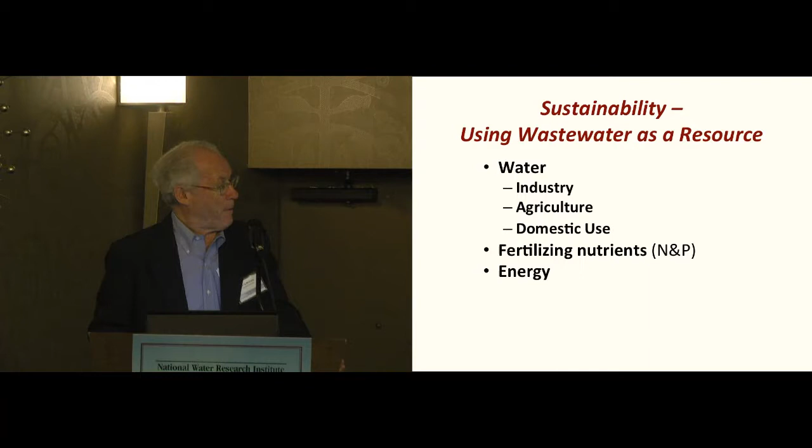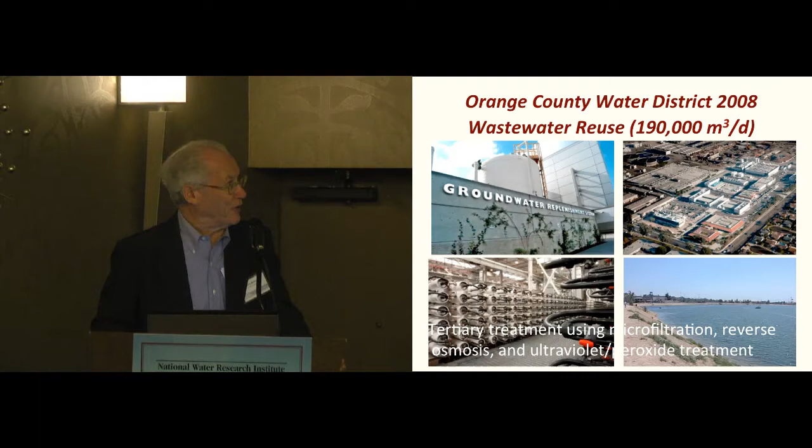Here, Orange County, of course, has pioneered reverse osmosis for reclaiming water. That was the major effort there, and it's certainly spread all over the world. Singapore has at least 5 treatment plants and is building more, using this in water-short areas. That's a very important process that has allowed us to expand our water resources.

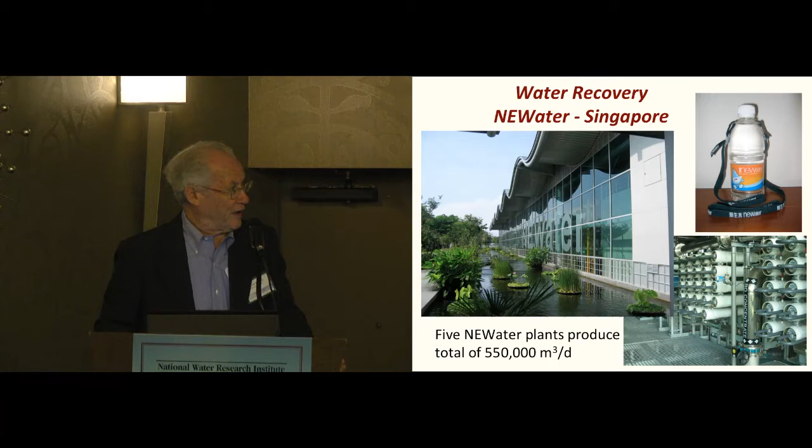However, if we look at the energy requirements in doing this and compare it with conventional aerobic activated sludge treatment, about 0.6 of a kilowatt hour per cubic meter is what the energy costs for doing that. If we add nitrification, we've got to add a couple tenths more onto that. There's a lot of emphasis today on aerobic membrane bioreactors. Going through the membrane takes a bit more energy, increasing it a couple tenths more, up to about 1 kilowatt hour per cubic meter.

Now, if we then go to reverse osmosis, as we're doing here in Orange County, the energy jumps up very high to 2.5. So while we're recovering water and going through more and more advanced treatment, we're putting in more and more energy. What I wanted to say is, can we achieve some of this without that? The process I'd like to compare is with the aerobic membrane bioreactor at 1, going that far, and see if we can do better than 1 using an anaerobic system.

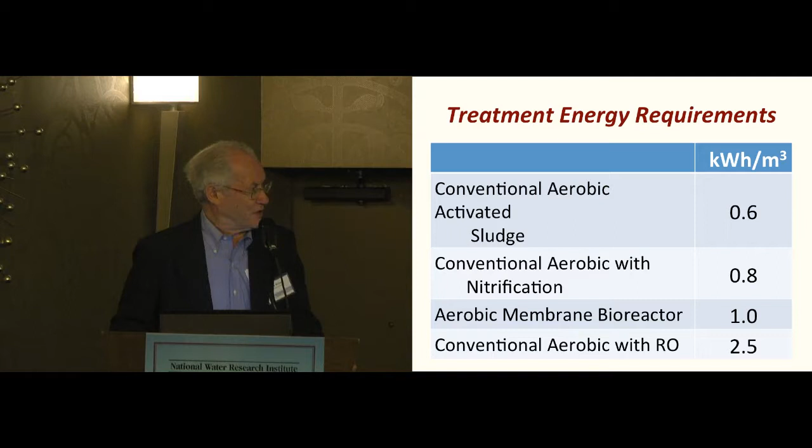So let's first look in general at what is the best option if we want to recover not only the water but also energy and nutrients. One good example I like to show is Monterey Bay, where, like here in Southern California, we're using groundwater, extracting groundwater, causing seawater intrusion. That's what happened here. This is a major agricultural area, not only for the state, but for the country.

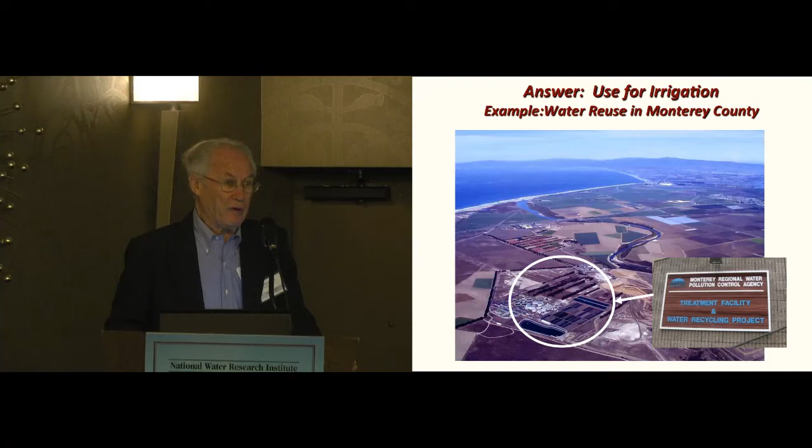By extracting groundwater, seawater intrusion destroyed that water supply, so they needed an alternative. They didn't have any other option except the treatment plant. The interesting thing here is that it's just conventional activated sludge with filtration—no nitrification, no need to remove nitrogen, because the nitrogen acts as fertilizer. So they go through the normal 0.6 kilowatt-hours per cubic meter treatment, sand filtration, multimedia filtration, and then put it onto the crops.

This is a major crop producing area. Something like 60% of the artichokes in the country come from this area, sprayed with this. A couple percent of the lettuce, strawberries, broccoli, and so forth that you're eating come from this area, grown with reclaimed sewage.

They do not have to remove the fertilizers—the fertilizers are used here. They grow crops 12 months out of the year, and they also have cogeneration with digestion, which produces 50% of the energy. So here they have a situation where they're recovering the water, recovering the nutrients, and recovering the energy, and I think that is the way to go.

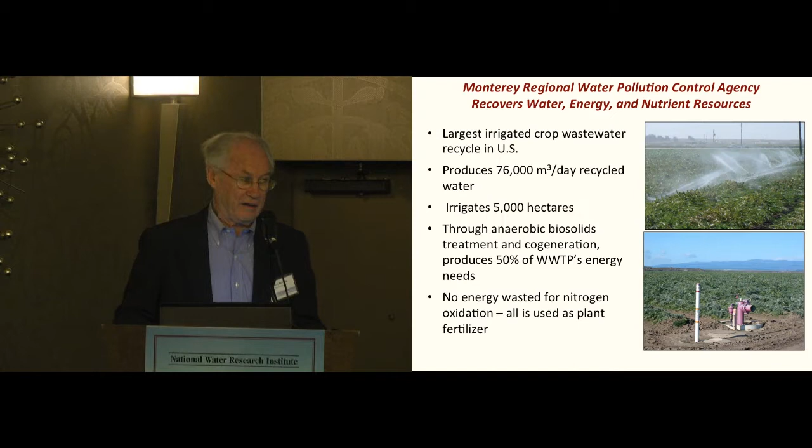Now, using it for agriculture this way—remember, in California we use something like 80% of our water for agriculture. Agriculture is consumptive use; you can only use it once. So if we use it first for human use in the cities, and then use that water for agriculture, we get two shots at using the water. If we use it on agriculture first, it's only one. So I think doing it this way makes a lot of sense where we can. I know we can't do it everywhere, but I think this would be our first option, and then we look at others depending on where we are.

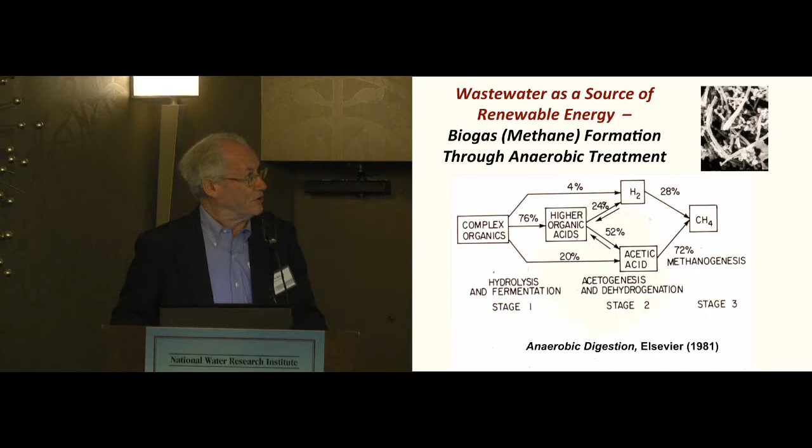Many years ago, over 50 years ago, my doctoral work was on anaerobic treatment, because I thought it was such a wonderful process for resource recovery. Even back then it showed a high degree of waste stabilization—converting waste into useful end products—low production of waste biological solids, which I want to emphasize very strongly, low nutrient requirements for industrial waste, no oxygen requirements, and of course producing methane, a useful, renewable fuel.

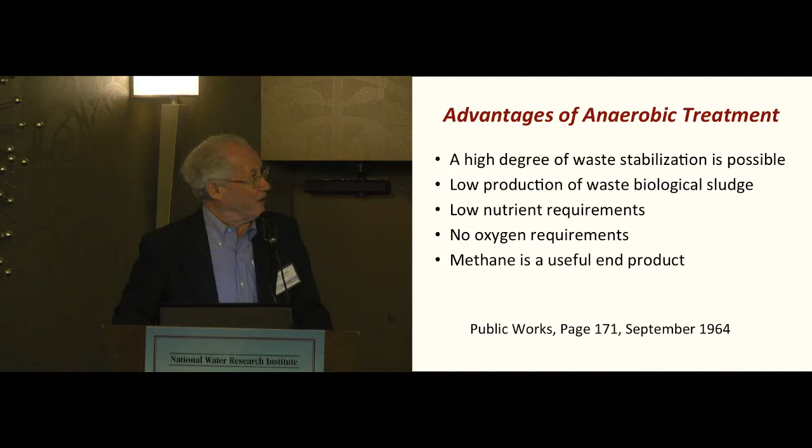We've been working toward that for many years, trying to see how low a concentration we can treat, and now we're applying it to sewage treatment. This is a diagram of a typical treatment plant. In the lower left-hand corner, wastewater comes into a primary treatment tank. We settle out the solids, send that sludge to a digester, and get methane from it. Then it goes to an aeration tank, an aerobic tank, where we put in air—using a lot of energy—and produce some biosludge, which also goes to a digester, giving us some energy from that too.

Today, we use a membrane reactor to clean up the solids and remove the effluent suspended solids so the water can be used for irrigation—that's typical of what we do today. In the upper left-hand corner, the digester produces methane used in a cogeneration plant, where we get electricity and heat—about two-thirds of the energy goes into heat, which is useful. But because this is such a high energy user, what we'd like to do is get rid of that—take it away.

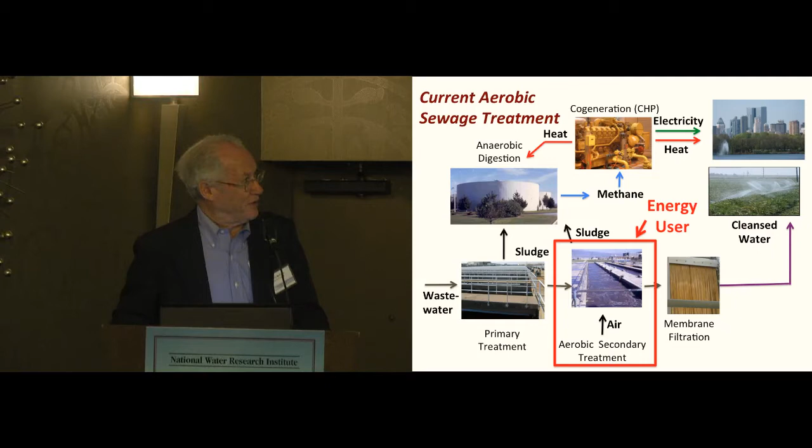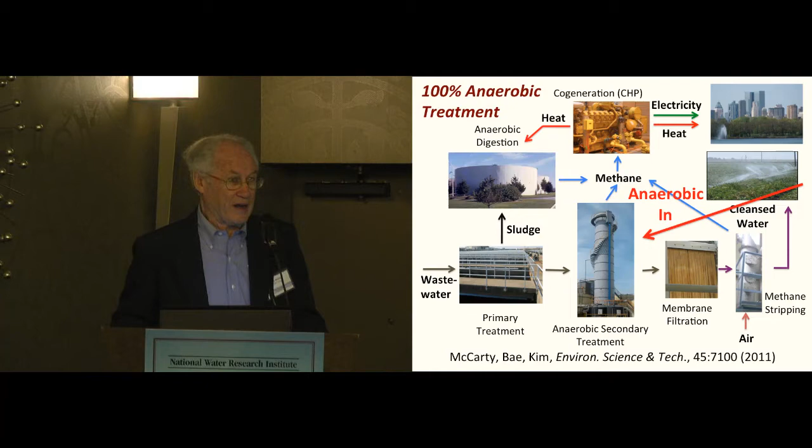Let's put in an anaerobic treatment system. We still have the primary treatment, collecting the sludge out. Anaerobic treatment works best with soluble waste, so the more biosolids we remove, the less trouble we have. We use a primary treatment tank, or you could do enhanced primary, that's fine too. Then we'll add an anaerobic system to get more methane, still use a membrane bioreactor, and at the end, on the lower right, you see a stripper. When we do this treatment, over half the methane stays in the water, and we have to get it out and use it. We can't let it escape into the atmosphere because it's a powerful greenhouse gas. So we put in a stripper to get that methane out and send it to heat generation. This way we get a lot more energy and a lot less biosolids.

So again, the potential benefits: significantly reduced energy requirement compared to aerobic treatment, more renewable energy as biogas. We think we can get a potential net energy producer, and greatly reduce the production of secondary sludge. This significantly reduces costs at treatment plants.

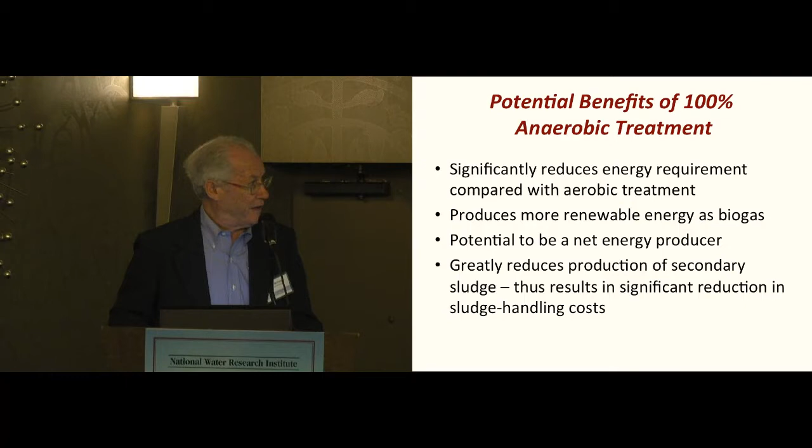What kind of digester should we use for this secondary treatment? There are many out there, all used successfully. One we like for dilute wastewaters is the fluidized bed reactor shown in the middle there.

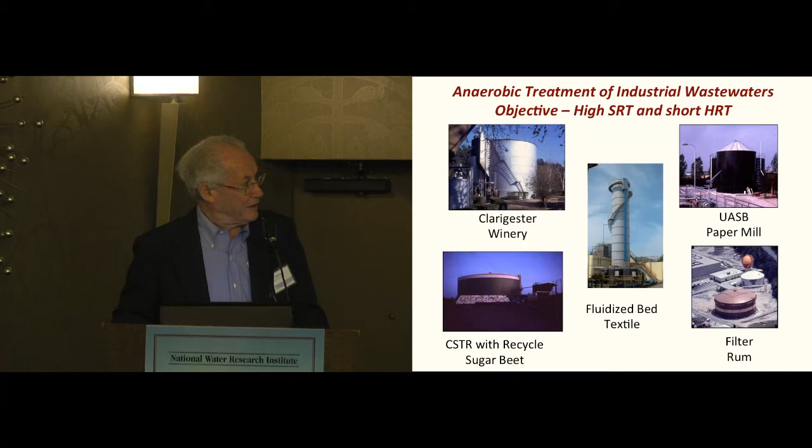Here's one in Taiwan. It's been treating industrial waste for 12 years with a 12-hour detention time. The wastewater has a COD of about 3,000. They use granular activated carbon with a recycle flow, so the GAC is fluidized and moving throughout the bed. Bacteria grow onto the granular activated carbon and remove contaminants from the wastewater. Interestingly, they filled it with activated carbon 12 years ago and never replaced or removed it. The waste goes in the bottom and comes out the top. The biosolids are so low in concentration they don't have to worry about that.

The treatment achieves about 3 or 4 times higher loading than an aerobic treatment system. What can be simpler than this? It's just a simple system sitting there, operating for 12 years without any problems. So we want to use that.

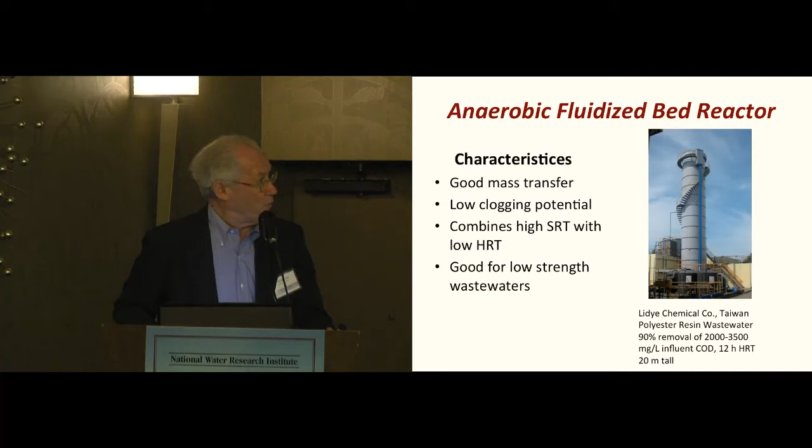This is the scheme we started with in our laboratory studies. We decided to do this secondary treatment in two stages. On the left is the first stage, a granular activated carbon fluidized bed reactor. The influent goes in there, gets partially treated, and then the effluent goes into the second one, shown on the right side. Again, it's a fluidized bed reactor with recycle water to keep it fluidized.

But in this one, we put in membranes, some hollow fiber membranes, just to see what would happen. To our surprise, something we didn't expect, as soon as we put those in, the granular activated carbon rubbing on the surface of the membranes reduced fouling.

In an aerobic system, we use a very high quantity of air, almost as much aeration as used for the treatment itself, just to jiggle the fibers and remove biosolids to prevent fouling. Here, it's just the gentle motion of the GAC rubbing on the surface, continually wiping them clean, that achieves the reduction in fouling at a very low energy cost.

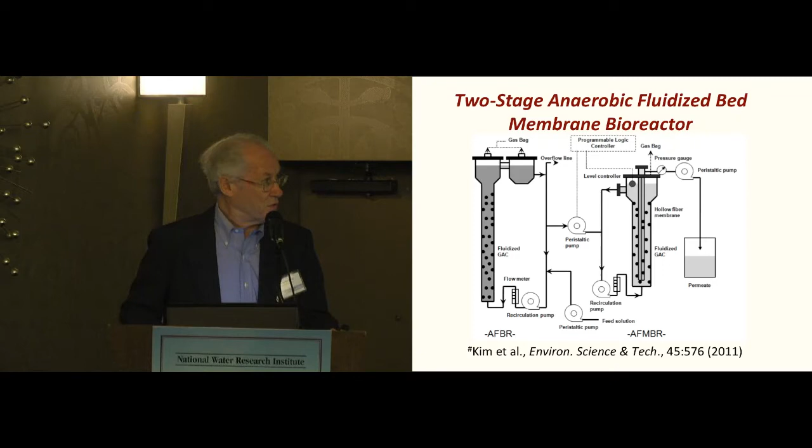This was a surprise to us, so we've continued to study this further. I want to show you something from the laboratory. When we started, we used a higher temperature - I don't think we should have done that, we should have started at 25, but we started at 35. We used a 200 milligram per liter synthetic waste COD, similar to sewage. In this reactor, it's a 17-minute hydraulic retention time. People say it doesn't happen fast.

At 17 minutes detention time, we get 90% removal. The loading was 17 kilograms COD per cubic meter per day, which is about 10 to 15 times higher than you can do in an aerobic system. So the footprint of this is really small. And look at the production of biosolids, only 0.045 kilograms per kilogram COD, about one-tenth of the biosolids production you get in an aerobic system.

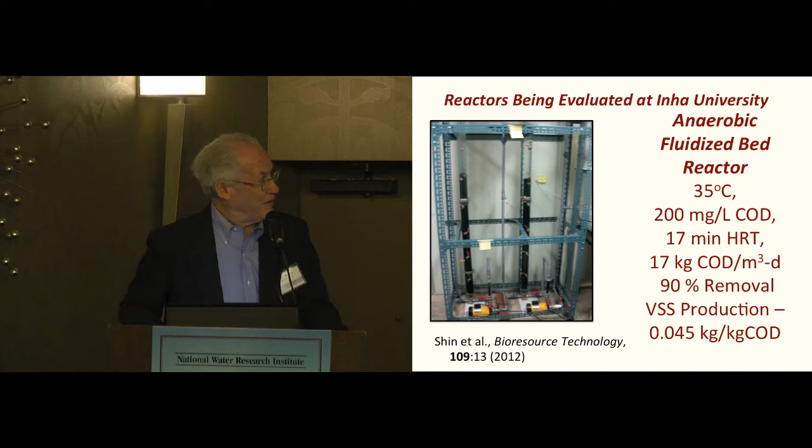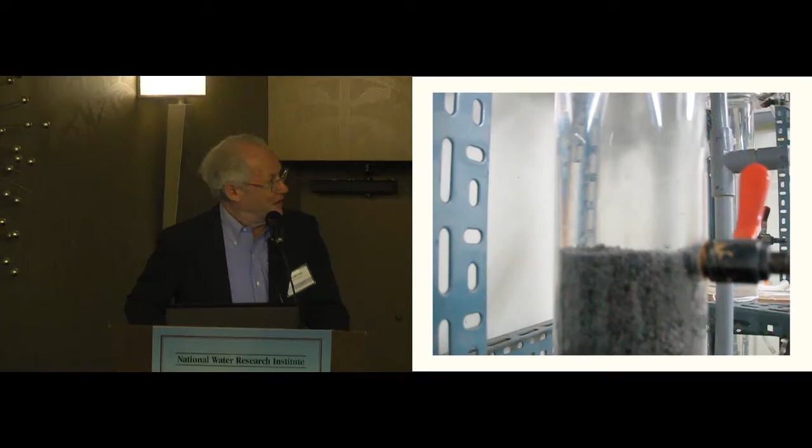So I just want to show our initial result. I want to show you here, if I can, the gas bubbles coming up and gas coming out of it. You see the GAC sort of bouncing around at the top and the gas pouring out from it. This is how it's working. If we go down, it's kind of a gray color, but as we go down it gets black and black, because as the biosolids build up and form that gray color, it removes to the top. It gets lighter and moves to the top, and down below it's more darker. But that's what a fluidized bed reactor looks like, operating at a 17-minute detention time.

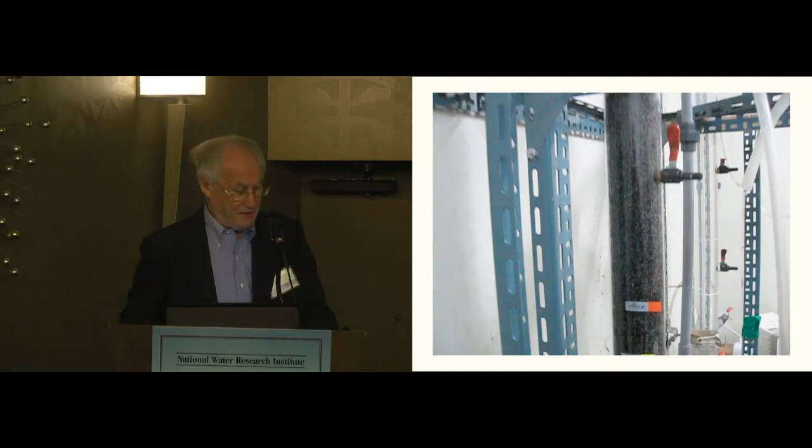Now, what happened there? Anyway, this is fine. This now goes from there to our fluidized membrane bioreactor, which is shown here.

On the left, we have two of them operating. The one on the far left has the GAC completely fluidized to cover the membranes. The one in the middle, you can see the fibers—we turned off the fluidization so the GAC would settle, so you could see the fibers. And on the far right, you can see the fibers at the top. So those orange things are the hollow fiber membranes, and the black is the GAC in there.

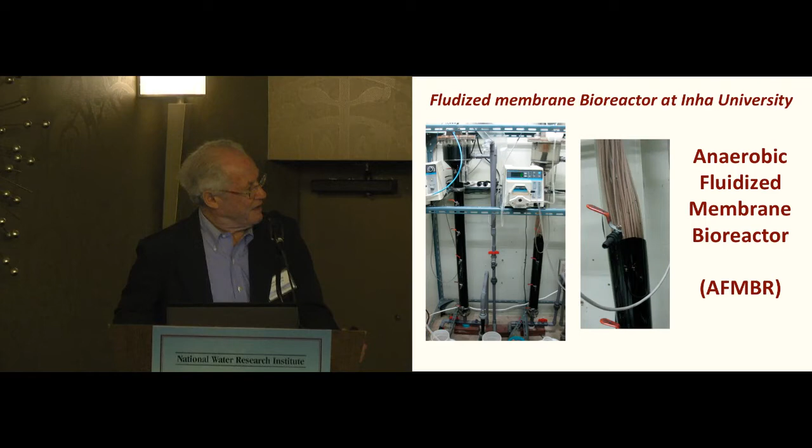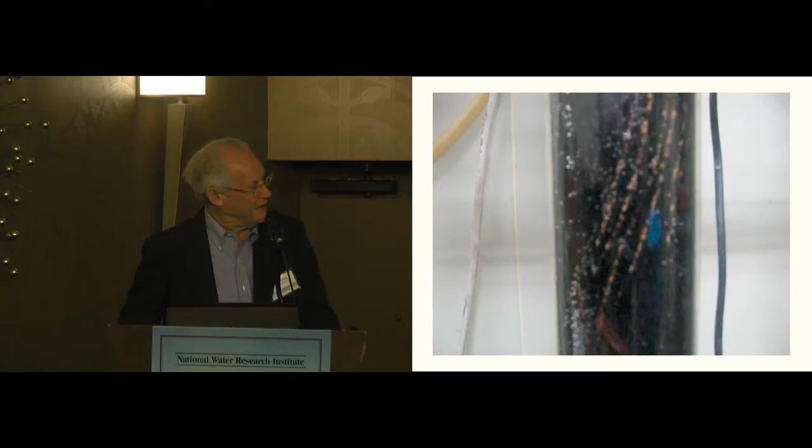Now here's a picture of it operating. You can see those little yellow lines—that's the GAC moving by as it's fluidized, moving along the fibers, cleaning them out and keeping that fouling from occurring. So here we've gone through all those laboratory studies, and then we decided we wanted to get to settled sewage, do something with real wastewater.

Now that's the first year of operation. Then we dropped the temperature to 20, then to 15. So the last 4 or 5 months it's been at 15 degrees, operating just about the same. And now we're just dropping it to 10 degrees to see how low a temperature we can go with this. I'd like to point out the detention time in the first reactor is only 1 hour—so that's the treatment efficiency with sewage at 1 hour.

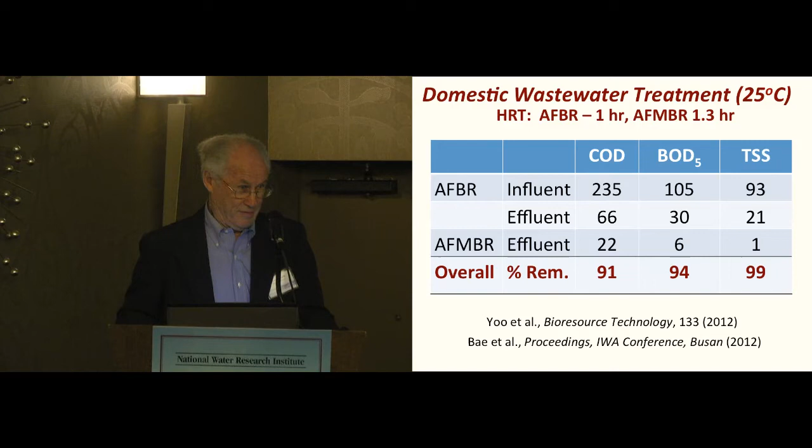We've had, just to show you some other data, this was that first year of operation at 25 degrees. The electrical energy required, this is how much electrical energy one has to put in to keep it fluidized, is 0.047 kilowatt hours per cubic meter, and that's going through the membranes and everything. That compares to about 1 kilowatt hour for aerobic treatment. Look at how low we get that.

And we produce, just from the secondary treatment, twice as much electrical energy. Now this is how much methane we produce. If we convert it to electrical energy, we get twice as much as we need to run it. So we're an excess energy producer.

And again, the biosolids production - something that surprised me - is still about 0.05, about 1/10 of what you get in an aerobic treatment system. The pressure to push it through the membranes is 0.12 of a bar, 1/10 of an atmosphere essentially, pretty low. And the flux we're getting is 9 liters per square meter per hour for this system.

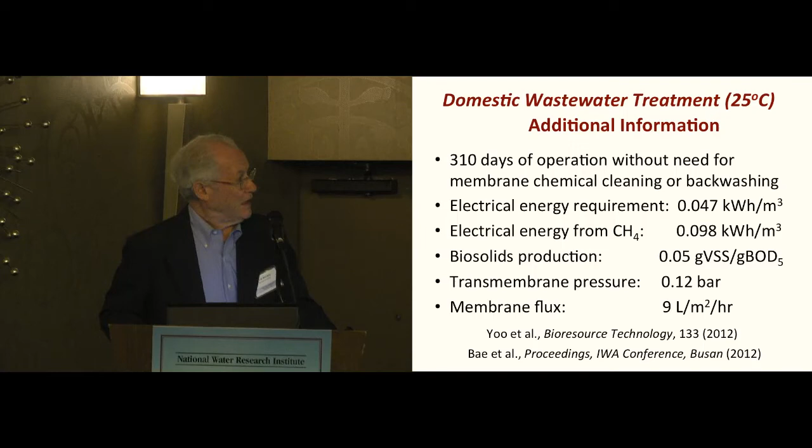Now here's, we're looking at this flux through the system. We were trying a higher one. We went up to 10. You see on the left, this is when we're doing it with domestic wastewater at 25 degrees. And we see after about a month, the pressure went way up.

We turned off the feed to it and just let the GAC clean it off and work for a bit, and then it jumped up again. So we reduced it to 8, and that was fine. Then we tried 10 again. It fouled again quite rapidly. So we reduced it to 9, and 9 is what we've been using for the last year and a half, with essentially no fouling at all. So there is a level that we can use and continue to use, which we have done.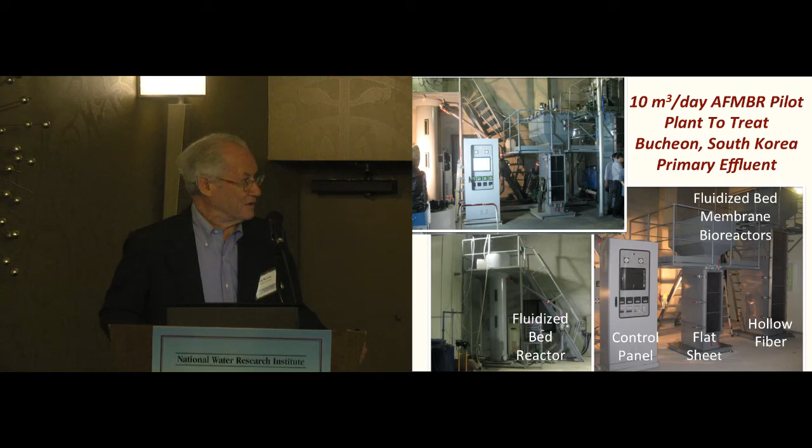We hope to start another one of these in Singapore. We'll start up next year. But overall, at the moment, it looks quite promising to go this route.

So in conclusion, I'd say that wastewater reuse for agriculture and landscape irrigation is what we want to do to the extent we can, because it's going to save our resources. There's no single system that'll work everywhere or satisfy every need. But I think if we think of recovery of nutrients and so forth at a minimum cost, that's the way we should do it.

Anaerobic treatment then produces energy and significantly reduces biosolids production, so we get cost savings in both ways. Now, we know we may have odors and things we have to deal with. Well, we're going to have a lot of money saved that can help us do that, and at the same time, recovering resources. So a complete and efficient anaerobic treatment of domestic wastewater now appears possible.

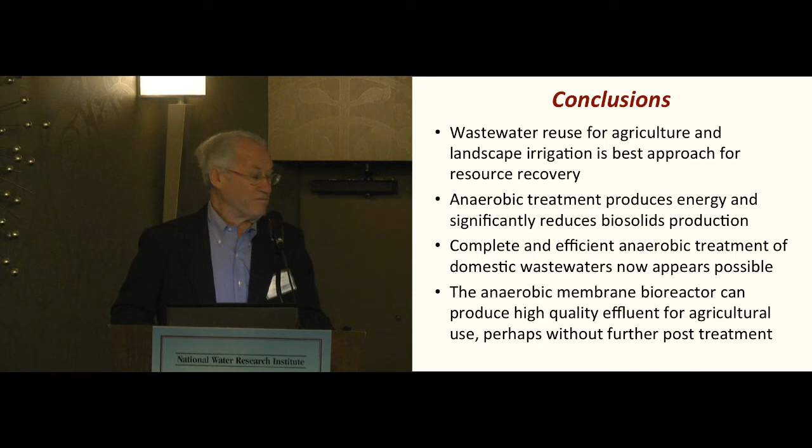And the anaerobic membrane bioreactor, I think, can produce a high-quality effluent for agriculture. And I think we can even go further - if you want to put an RO system on the end of it, why not? So I think we can go there as well. So thank you very much.